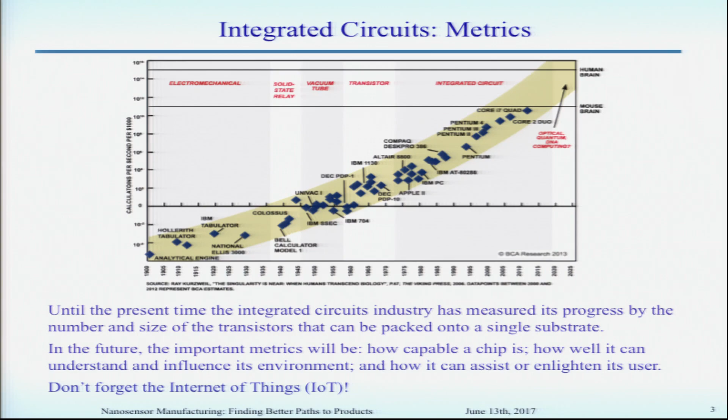That's starting to change, I think, and it's changing in important ways because it's now becoming how capable the chip is. What does it do for the user? How does it influence the environment? How does it enlighten the user? And of course we have the Internet of Things, where these microchips and nanochips not only sense things about the environment, process the information, store the information, but also communicate with other things and other entities out in the environment. So that's a very interesting concept.

A lot of these technologies leverage heavily from the semiconductor manufacturing realm. And it's the kind of integrated circuit processes that people use to build electronic devices.

So if you look at, I have to see, is this the laser? It's on the bottom, yeah. Is it on? Yes. Oh, okay, I see it now.

So if you look at the cycle of events here, you typically do a deposition of material, pattern transfer, photolithography, removal of material by etching, and you continue this cycle over and over again. And then once you're done, depending on how many photolithography steps you have, you do testing, sectioning, and packaging and testing and things like that.

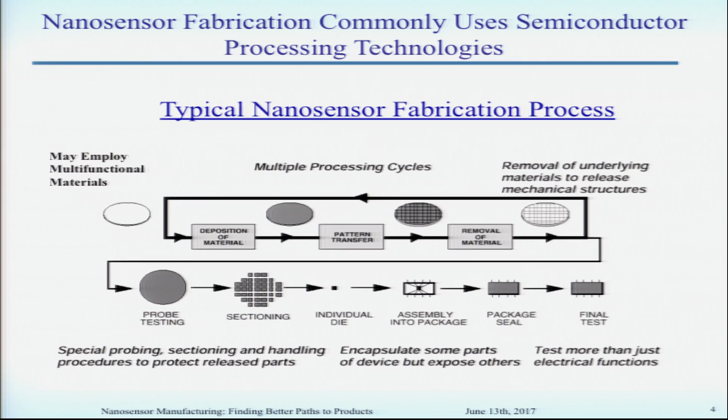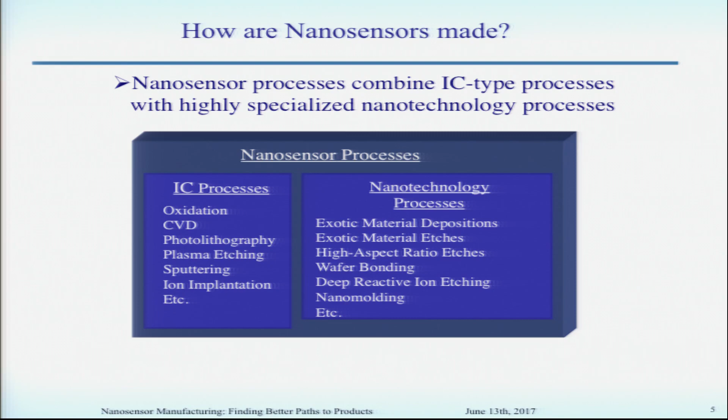So all that's nice and fine, and we leverage for these kinds of technologies heavily from the integrated circuit world, the standard processes that you see in any integrated circuit foundry operation. And we combine that with these very exotic things, like exotic material depositions or exotic material etches and wafer bonding and nanomolding and things like that. So we're leveraging this pre-existing, well-developed, mature technology base of integrated circuits. Whether we're using an integrated circuit foundry or not is not the point. The point is we're using that equipment set, those technology types.

And we're combining that with now these new kinds of things that allow us to make nanomaterials and nanostructures and things like that. So I think it's kind of useful to go through and highlight some of the differences between this mature technology of integrated circuits and this, frankly, less mature technology of nanosensors.

So integrated circuits have three basic mature device types: transistors, resistors, and capacitors. That's all there is. So it's pretty simple, and they're wired up differently to form different kinds of circuits and stuff. You get into nanosensors, and it's all over the map, almost any kind of thing. They could be chemical sensors, biosensors, mechanical sensors, and that's a high-level description because you can get all different types of each of those sensor categories.

Integrated circuits have very standardized process technologies. So there's a thing in the integrated circuit industry called process technology. That's a manufacturing process that's used in production, and it might be 20 or 50,000 wafer starts a month. A process sequence is something that is more appropriate to prototyping or a one-run, one-off kind of process, where it's obviously not in production and not nearly as well developed.

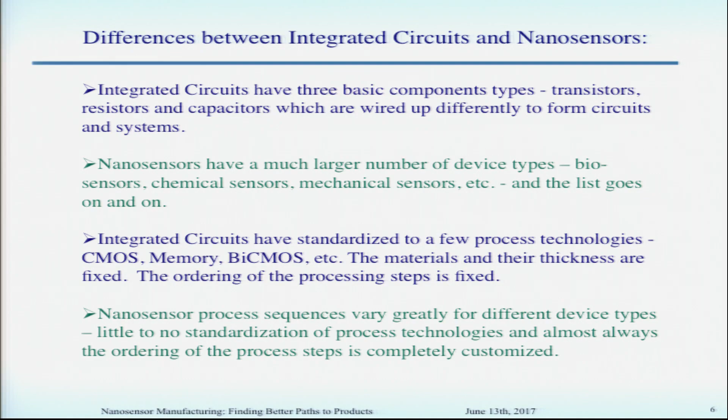So the integrated circuit industry has standardized processes like CMOS and memory and stuff like that. But you look in the nanosensor world, and the process sequences vary greatly for the different device types. There's no standardization for any practical purposes, and they're almost always completely customized in terms of the processing steps and the ordering of the processing steps. Integrated circuits have a standard set of materials and processing techniques. Nanosensors use a much wider diversity of materials and processing techniques.

Integrated circuit foundries are kind of one-stop shopping. Everything you need for making them is under one roof, whereas for nanosensor fabrication, the core competency in commercial foundries is very limited, if it even exists at all. And it's limited to what's useful for IC manufacturing. So therefore, the design and process freedom for building nanosensors could be very, very constrained.

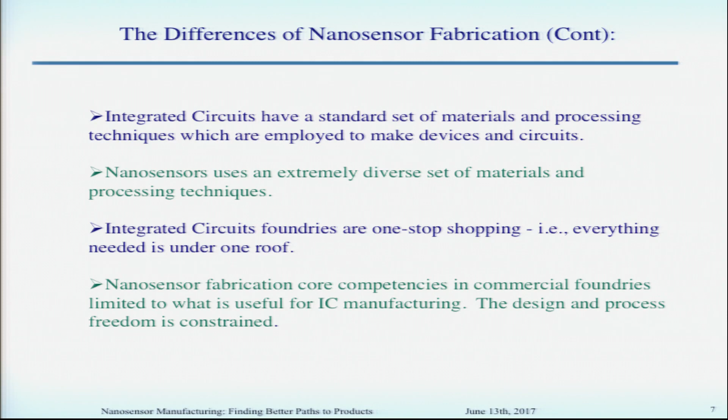Integrated circuit foundries are easy to access. There's really two models. One is a self-producing model, like Intel, where they have their own foundries and they produce the microprocessors. And the other model is like TSMC, Taiwan Semiconductor Manufacturing Company, where they have a standardized process and people just send them the designs and they manufacture them no matter who they are. Access to nanosensor fabrication resources can be difficult and expensive, and you need very detailed knowledge to make good decisions about what foundry to use.

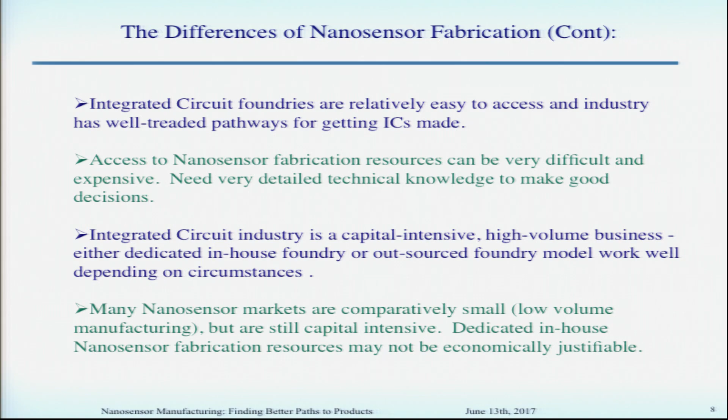The integrated circuit industry is very capital intensive, many billions of dollars to build these foundries. And like I said, dedicated in-house foundries or outsourced foundries work well depending on the circumstances. Most of the nanosensor markets are so small, low volume manufacturing, that it's not only a capital intensive business, but dedicated in-house fabrication resources are probably not economically justifiable.

So I'm going to talk about development of these kinds of devices, and I'm going to mainly focus on MEMS. And the reason I'm going to do that, I know it's a micro device instead of a nano device, but the fabrication technology is very similar, and I think we have much more experience with MEMS development of sensors than we do for nanosensors. There's just not a lot of track record built up for nanosensors that have gone through the science, the development, the prototyping, and into production to really know how long these things will take. What I would tell you up front, I think MEMS is probably easier than nanosensors would be. So this is probably putting the best spin on what you're looking at, okay?

So for MEMS development, what we normally see is a concept phase of 6 months or less. This is where the brainstorming is going on, and some design and engineering, analytical stuff like numerical analysis, finite element, things like that. And then it goes into the development phase, and this is where the trouble starts. The trouble starts with designing and building customized process sequences that actually yield, okay? And that can take more than 8 years, and I'll show you in the next chart some real-world case studies on how long it takes, and then you get a transition to production.

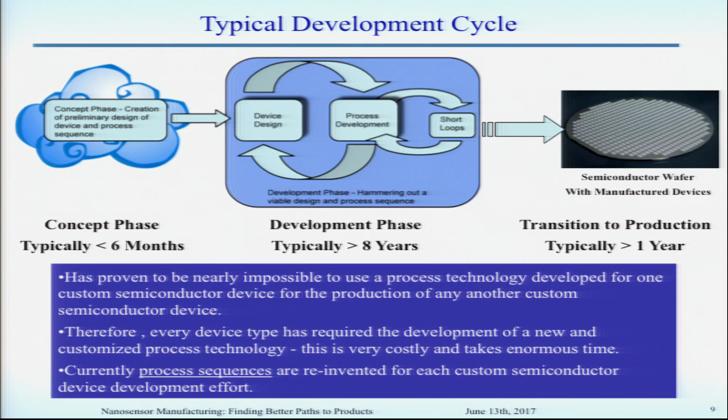I'm sure they're willing to talk to you. The problem is that it's like trying to fit a square peg into a round hole. They typically will not have any experience, probably don't even have the right tool set for what you're trying to do in your particular case. There's these differences that come into play that can be real problems to overcome.

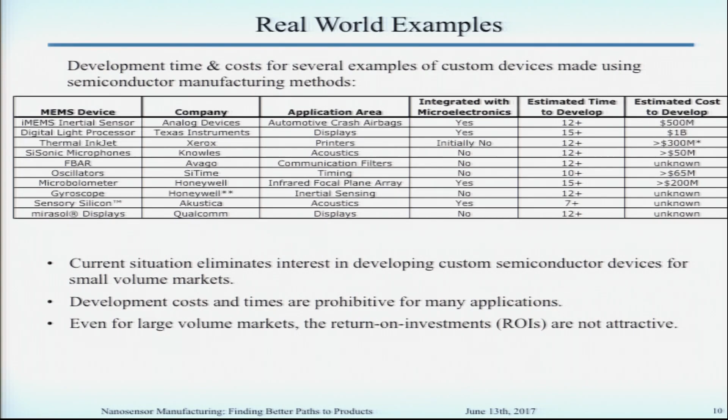I mean, everything is pretty much over a decade, okay? And in some cases, like the TI DLP chip, that's actually more than 20 years. We're talking over $1 billion. You can imagine if you go to a VC and say, I got this great idea, and all it needs is 20 years and $1 billion, and you'll get your money back plus something. It doesn't work. So again, this is for MEMS devices, and I expect that this is probably a more positive story than you'll see. So the bottom line is, even for large volume markets, returns on investments are not attractive. And this is an important thing.

Just to give you an example, Analog Devices. They spent $500 million on that airbag accelerometer, okay? Took them 12 years, really 15. They still sell those devices. Their annual sales are about $230 million, okay? Now, that's sales revenue. That's not margin.

So if you look at where they're selling into the automotive market and consumer electronics and stuff like that, they might be able to get, I'm going to be very generous here, a 20% margin, okay? 20%, that's probably way too high. So let's say they're getting 20% on a $250 million market. That's $50 million a year. 10 years just to pay back the development cost, not including the cost of money. That's not a good story from an investment standpoint. And there's a lot of similar stories with all these, okay?

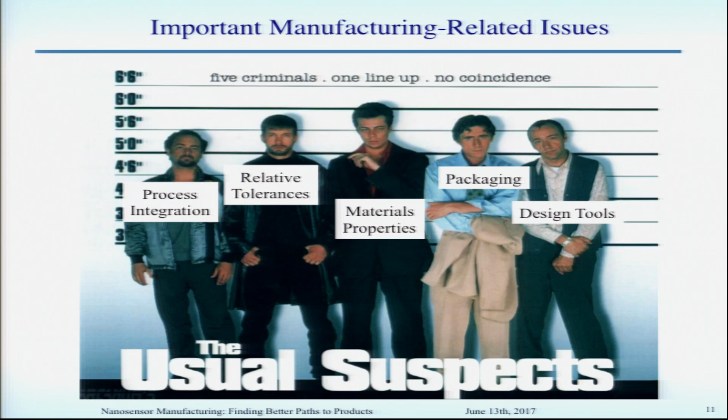So let's dig a little bit deeper and look at some of the problems here which cause this. And I call these the usual suspects. So these are the criminals that steal from us. And there's more criminals than this that I'm not showing. So these are ones I'm just going to highlight. In fact, I'm just going to really highlight 3 of them for the sake of time here. The process integration, the tolerances, and material properties, okay?

So process integration, what does that mean? That means I've got process step A, process step B, might be a thermal oxide growth, the nitride deposition, a photo, each of these processing steps. In order to make something that's manufacturable, I've got to get all those processing steps to work together so I have yield at the end. And typical yield numbers for the integrated circuit industry are 95% or higher. For the MEMS industry, they vary from that high down to 5%. So it really depends on what you're doing.

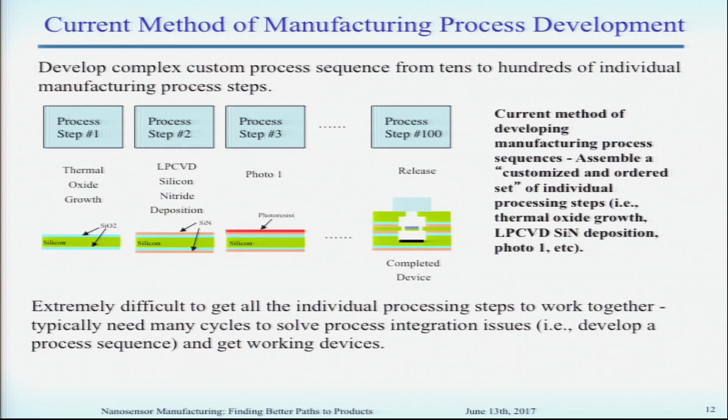And if you're selling to the military like we do, we can get away with a 5% yield because they'll pay a lot of money for these specialized devices, okay? In the consumer electronics world, forget it. They want a 90% yield. They want these things at jelly bean cost. So the process integration is getting all that stuff to work, but to get the yield, and to meet my performance specifications as well.

So the yield number is not just whether the device works or not. It's got to meet the performance specifications for the intended application. All right? And I'll talk a little bit more about that. And this is where most of the development happens and most of the money is spent, is developing these process sequences, doing the process integration work.

Relative tolerances. I cringe every time I hear somebody from my community say that these technologies give you high precision. It's not true. It's the reverse of that, okay? I'll give you an example on this slide. So let's say I'm making a metal interconnect here. So I got a pad, and just a line of metal between the two pads. Okay, pretty simple. And let's say the feature size is 1 micron.

So that's the width of that device. And I could do that at a tolerance of 0.1 microns. That's probably a fairly good spec for a contact lithography process. So if I look at my relative tolerance, which is the amount of variation I have divided by the width, it's 10%. That's a big tolerance.

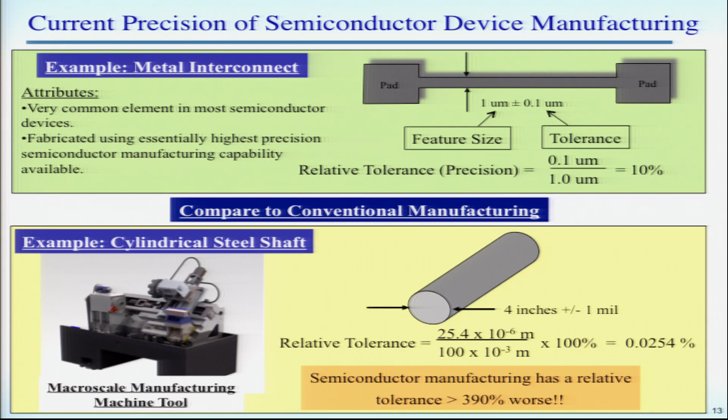So you do the math on this, 25 microns divided by 100 millimeters, 0.0254%. You can see the difference here. Now if I just divide the two, it means the semiconductor manufacturing, at least for this device, is almost 400 times worse on the relative tolerances. It's amazing anything works, isn't it? And it gets worse as you get smaller.

Those tolerances go up. So here what I've done is I've plotted the relative tolerances. This is a logarithmic scale here in percent. Typical feature size, so we start 10 to the 8th down to 1 nanometer. And on this scale, we've got relative costs. So there's 2 curves here, green for the cost as things get smaller, and a red line for how the relative tolerances go as things get smaller.

So we can see on here some data points. These are data points for going to that machine shop over at Dulles Airport using macro scale machining techniques. And this is kind of relative tolerances I can get. If I look at what I'm doing with contact litho and RIE etching, and let's say I'm making something that's on the order of 10 microns or something like that, I can get a relative tolerance of between 1 and 10%.

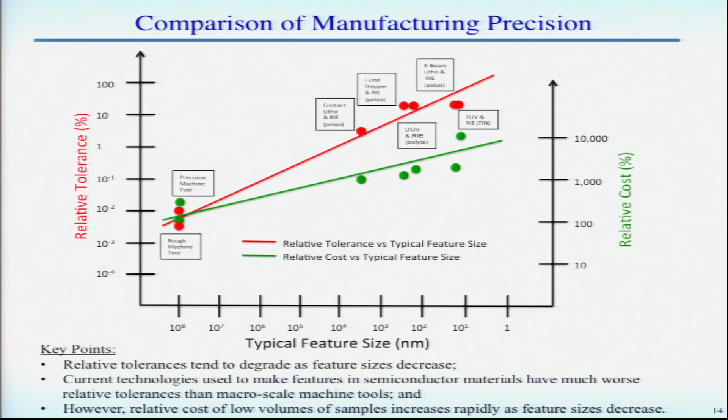Okay? So I'm talking about a line width, not to confuse you with that previous example, but a line width that's a little bit bigger than that 1 micron. So more of a MEMS type of thing. As I shrink the size, though, let's say I go to an I-line stepper lithography, RIE, on, say, a polysilicon layer, I get to above a 10% tolerance, and I go to E-beam with RIE, and I get maybe the same, but my cost goes up.

So the point being that the tolerances get higher as I get smaller as a typical function, but the costs go up. So you can see from the machine shop here, I've got a cost level that's normalized to $100, and then when I go to some of the advanced nanotechnology or integrated circuit technologies, I'm somewhere between 10 and 100 times higher. So the cost goes up very significantly.

But there's another point to this. And the other point is something that people sometimes miss, and that is you got to be careful about the physics involved in a device too. And what I mean by that is if we can look at the power relationships of the equations that define these devices. So the nice thing about digital electronics, and the reason that they work so well, is because they're simple switches, they're on or off. So they're relatively forgiving for tolerancing issues with regard to the gates in these devices.

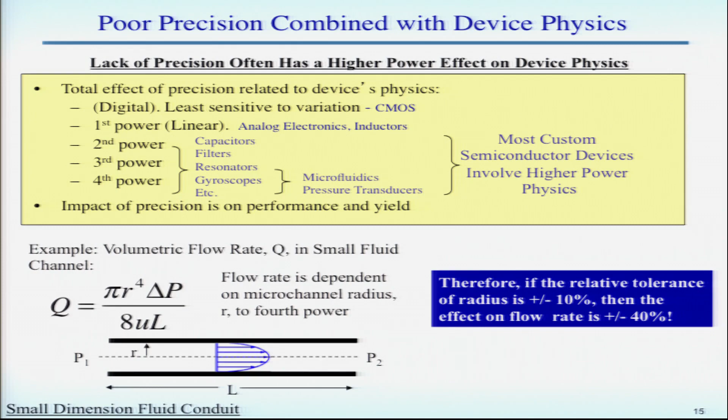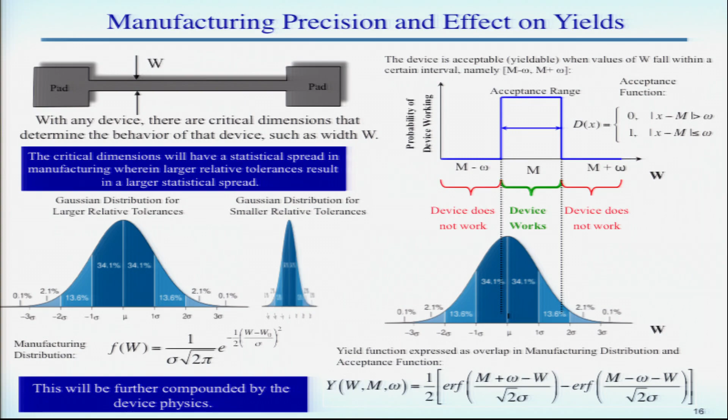So looking at this in simplistic form, you typically have two kinds of things going on. So let's say this is my statistical distribution, and my acceptance range superimposed on that. I've got a bias error here, and I've got a random error set by whatever the Gaussian is, right? But I'm looking at what my yield is, which is the intersection of these two, and it's only this stuff at the tail. So in other words, I've got a pretty crappy yield here, right?

Now, I can remove the bias errors pretty easily. I can change the mask designs, just change the dimensions, if I know how much my etching processes might be affecting my offsets, if you will, in the tolerances. So I can move this acceptance range over on top of the statistical distribution pretty easily by changing the mask set. And people do this all the time.

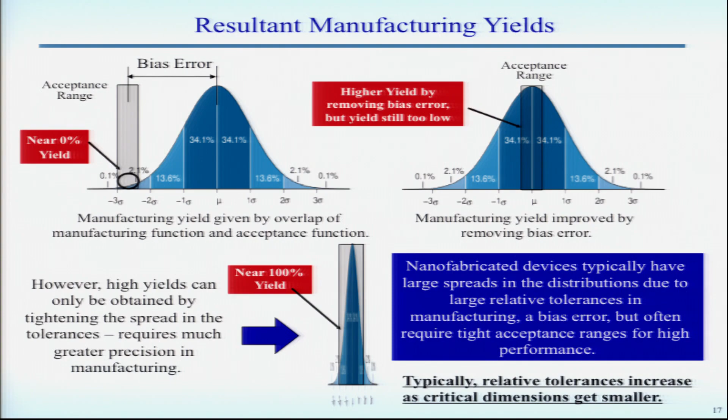But you can see still the problem is my acceptance range is only so narrow and the statistical distribution is much, much wider. So the yield's gotten better, but it's still pretty bad. Really what you want is a situation where I've got an acceptance range and my statistical distribution fits in nicely in that acceptance range, okay? And these nanofabricated devices, again, typically have large spreads in their distributions.

Material properties, okay. So this is something that we face daily, which is you deposit thin film materials and the material properties are not only not very well controlled, they tend to vary depending on what other process steps might be done after you deposited this material. So if I put down a layer of material, and let's say it's got a compressive stress in it, and I want that compressive stress to be a certain value, life's great.

The only problem is I probably have a multiplicity of processing steps that follow that deposition of that thin film material, which then can affect the material properties. And particularly any kind of thermal steps will radically change those material properties and can change it even from a compressive stress to a tensile stress or vice versa.

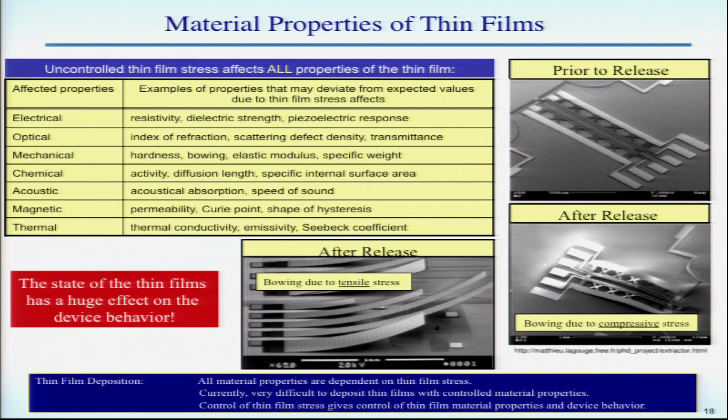So we tend to focus on stress issues because that's the more important one for things that have any kind of mechanical functionality. It also affects the electrical behavior, though, the stress levels in these thin films. And it has a huge effect on the device behavior and, of course, affects the resultant yield. And you get not just the yield loss and poor reliability, but it also increases development times and costs and stuff like that.

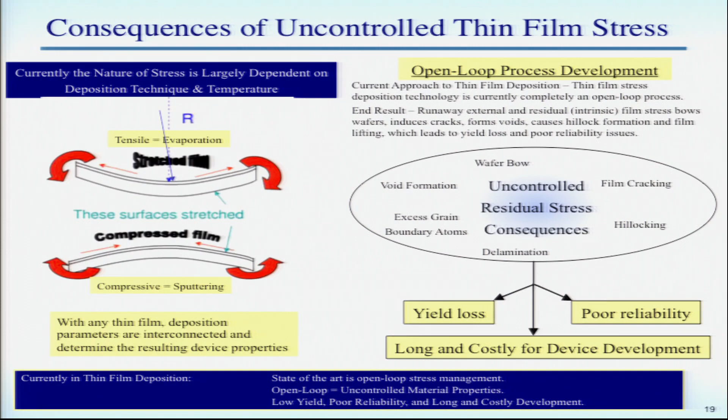So what can you do? So I've painted what may be seen as a dreadful picture. I don't mean it to be that way. I think it's more of a realistic picture to know what you're getting into.

So recommendations, and this is coming from a lot of time spent pushing wafers through the fabs. You want to keep the device design and manufacturing process as simple as possible. Nothing is worse than getting caught up in a complicated process that's not going to work for everybody. And a lot of times the designs on these things tend to be a little bit overcomplicated, if

not a lot. In the MEMS industry, there used to be a lot of people who wanted to merge the most advanced electronics with sensors, and that was always very difficult. And I think for the most part, people have kind of given up on it, at least where the state of the technology is, because trying to deal with where a 10 nanometer gate is even located on a chip is a problem. You can't even find it, much less connect to it.

Consult early with industry fabrication experts on developing manufacturable processes, and that doesn't mean the guy in the EE department who runs the lab at your university. Sorry, but this means somebody who actually has to do stuff for production and lives or dies every day on whether the production line can meet its cost goals and satisfy customers and stuff like that.

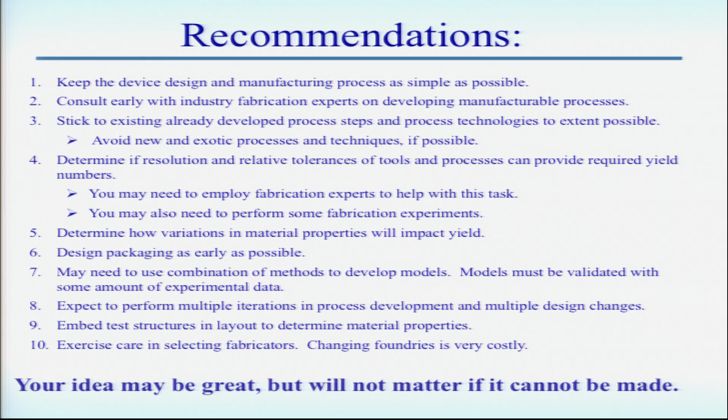I guarantee you that. And the big guys, the TSMC, they won't talk to you for less than $1 million. So you can't even get a conversation going. They're also going to be resistant on getting into issues like relative tolerancing and stuff like that, because those become proprietary. They'll have design rules for integrated circuit process, but if you're trying to do something unusual, it's a different ballgame. They might not even know. They need to go and measure it.

So the point being that you don't want to change fabricators. So your idea might be great, but it won't matter if it can't be made.